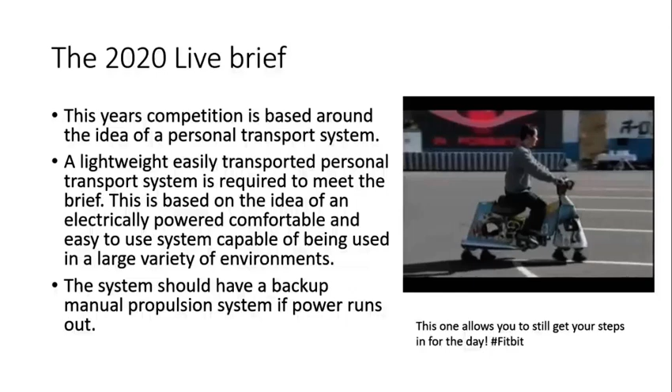First of all, this year's brief is a competition based around a personal transport system. We need you to make a lightweight, easily transported personal transport system that will fit into a rucksack. The rucksack is up to you, but there is a criteria that will look at how large that rucksack is and how much the item actually weighs. So lightweight is the key, small, portable, but yet functional. There's going to be a fine balance between those.

The main project itself is deliberately quite open this year, to allow you to create and use your mind as much as possible to come up with a solution that's as diverse, new, as old. It can be exactly the same as something from before, or it can be something completely new. It's up to you. We've left the criteria really open so that you can choose.

But broadly speaking, the competition will still follow a set format. The main project this year is worth 41.5% of the marks. That is quite a low mark, and even if you scored 100% on the main project without the other elements, you will struggle to get anywhere near the medals. The second part is the main project costs, which comes to 5%. We'll go into those in a little more detail.

Portfolio A is worth 10% of the marks, and that's something that you bring with you, something that you could have done before the competition, so you should be looking to maximise those marks when you arrive. And Portfolio B, which is the CAD drawings, is worth 13.5% of the marks.

There will also be an additional 3 surprise projects worth 30% of the marks. So please note the surprise projects are worth almost as much as the main project, and the costings and the Portfolio A and B are worth almost as much again. So it's critical that you realise the main project is not the only element of the competition.

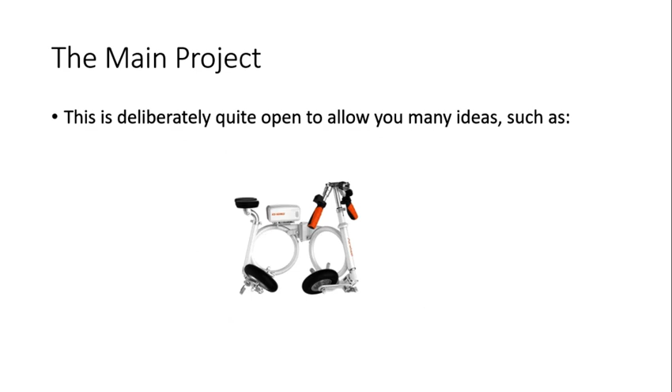Something that's a little bit more likely is something like an electric push bike that folds, such as the one on the screen, although I would suggest that might be a complicated build for 3 days as well, but you may have another similar solution.

Or you could go for something such as an electric skateboard. Very easy to put into a rucksack, not so easy to ride, perhaps not so manoeuvrable as some of the other options, but it's up to you on which way and which direction you want to take.

So the main project itself has 21 elements, and some of those elements have sub-elements, so there are quite a few criteria to hit, I think around the 30 mark. So the following slides, I'm going to go through each one of those individually and explain what we mean, and make sure that you're happy with what's required.

So the first one is toolbox weight. Now this is the first time that this has been brought into the UK national competition, but it's a normal mainstay of an international competition. So we brought it in to bring parallels. This requires you to design the item to be made with the minimum amount of tooling and the minimum amount of jigs etc. that you bring with you. This is part of our sustainability drive, really.

So instead of shipping large amounts of components, large amounts of equipment around the country, we'd rather you just brought a little handbag. But of course you may need more than that.

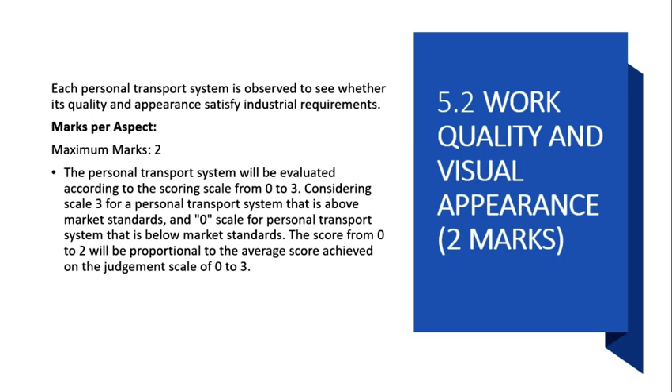How we mark that is each judge will be asked to mark it from 0 to 3, 0 being below industry standard, 3 being the absolute excellence of market standard. The 2 marks allocated will be split into equal proportions for each judge, and you will receive 1/3 of the mark for each point that the judge gives you. So if a judge gives you 2 and there are 3 judges, you'll receive 2/9 of the 2 marks for that judge.

So the judgment scale literally looks at this. Scale 0: project does not meet industry standard. That would be unfinished, very, very poor. Wheels buckling, not fitted correctly, motor not connected, all those kinds of things.

Scale 1 then satisfies the industry standard, so it's better than that. It is complete, it's finished, it's assembled, it's operational, but it doesn't have any outstanding features. It's just a plain bog standard design, something very basic, very easy to have made. Perhaps the finish on it isn't very good.

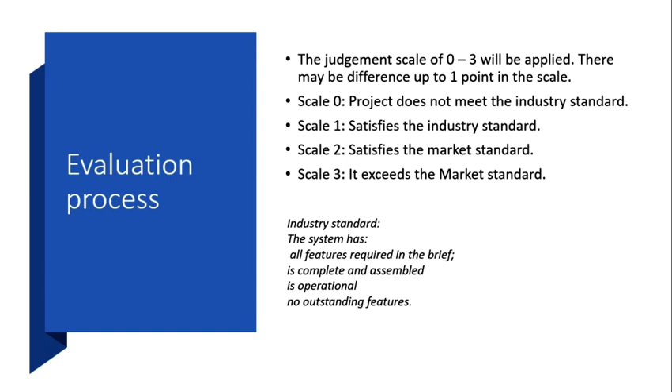Scale 2 satisfies the market standard. We're now looking at something that's complete and works, as in scale 1. We're also looking for a finished exterior, coloured on all visible surfaces, has all burrs removed and no sharp edges, all screws and fixings are hidden or are part of the aesthetic design, and you will be consulted as to whether that's the case or not. Minor blemishes, bubbles or defects can be seen in the surface finish, but nothing major - no big huge scratches or marks or indentations or anything like that.

And then the final one, scale 3, exceeds market standard. To exceed market standard, you have to have satisfied everything on scale 1, scale 2, plus all market standard features, plus a flawless finish to the exterior, no blemishes, bubbles or defects can be seen on the surface, and the addition of graphics or a logo on the exterior to attract potential buyers.

We all know big brands - Apple, Microsoft, Nike. You all know the logo for those brands, and it is the logo that brings in a lot of their business. So we're looking for something similar to that as well.

All drive components, save steering, wheels and axles, are covered from user access, so we shouldn't be able to see the chain or motor or any cogs or anything like that. Anything that could cause a potential trap hazard or potentially hurt the user, we don't want to be able to access that. Wheels and steering obviously have to be an exception, and the same goes for axles.

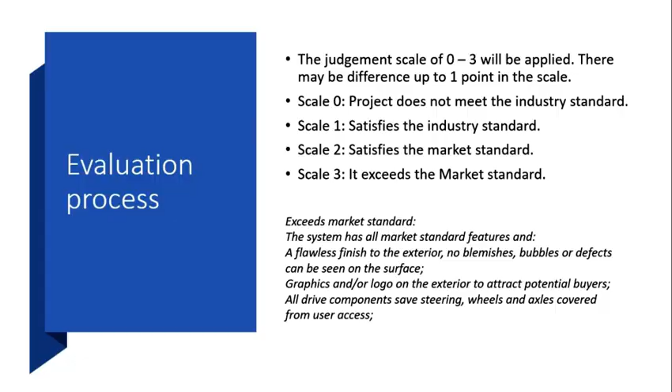So right at the very end of the competition, we're going to do something new, which is the judges packing and unpacking evaluation. You're asked for instructions on how to remove the item from the rucksack in Portfolio A, and then how to set it up, giving all clear labelled instructions throughout the portfolio.

Show how to do that in very simple English, very detailed if possible. The more detailed, the better the mark, because the judges, using nothing but those instructions, have to remove your item from the rucksack, unpack it, drive it 2.5 meters, and pack it back away. We'll time that to indicate how simple and easy it is, but that's not the main criteria. The main criteria will be ease of unpacking, so a judgment of the setup instructions.

If we can't do it using your instructions, you'll receive no marks. If we can do it but don't feel the instructions are clear, you'll get 0.2 marks. If the instructions are clear but it's difficult to set up, 0.4 marks. Clear instructions and an easy setup will gain you 0.6 marks.

The second sub-criteria is ease of operation. If we could not do the operation with the instructions, so we don't know how to turn it on, or make it move, or get it going, you'll receive 0 marks.

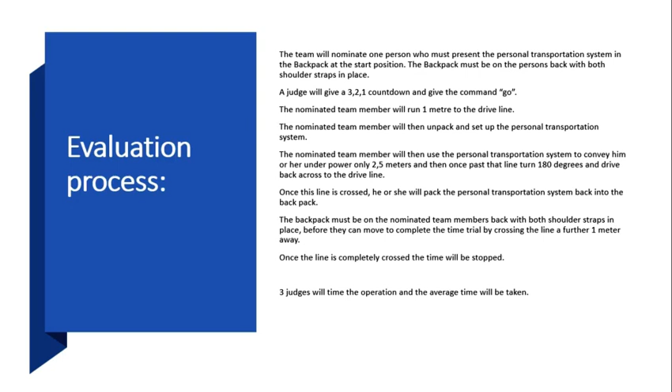Judges will time all of this, and you'll be asked to declare by putting your hands up when you've finished. As soon as your hands are up and finished, we will check that both the backpack straps are in place and that you've crossed the line, and the time will stand. So, weight.

We are going to basically weigh your entire system. That'll be the rucksack, batteries, control system, and the personal transport vehicle all in one. We will then see whose is the lightest, and the lightest team will gain 2 marks. The heaviest team gets 0, and the other 4 teams in between will be marked proportionally.

This is what we call CIS scoring. There's quite a lot of it in most MTC test projects, and it's a way of sorting who performs best from who performs worst from who performs in a mediocre manner.

So now we're looking at 5.6 for ergonomic hand controls. 3 judges will hold the hand controls. For safety, the hand controls must have an easy to press dead man switch to cut power when released. It could be part of the speed control mechanism, such as a trigger, but when it's released it must spring open and stop all power. Or it could be a separate button that you press, with speed controlled some other way.

So for having a dead man switch that cuts all power, you receive 0.5 marks. For having speed control, you receive 0.5 marks. And for having an ergonomically easy to handle control with a nice button or a nice speed control system, or both, or one or the other, whichever way it's being done, operable by just one hand, not two, you will receive 1 mark.

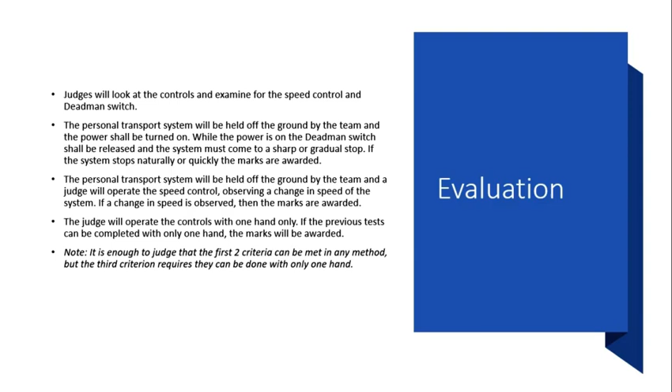We'll also hold it off the ground again, and you will demonstrate the speed control, and we need to observe a definite change in speed as you maneuver it. Then the judge will operate the hand controls with one hand only, to ascertain how easy it is.

So safety, this is a mainstay, always there, always the same. There are 4 points to the safety. All movable components must be guarded from access with an item larger than a rod of 12mm in diameter and 75mm in length.

What this actually means is if you have a gap that's only 6mm wide, you couldn't get a finger in, so that's acceptable. But if you have a 14mm gap that a finger could go in and be potentially trapped, then that is more of a problem. The only movable parts allowed to be seen are the wheels of the system, and this does not apply during setup and packing, because with folding mechanisms other things may become exposed.

All conductive components and electrical circuits shall be guarded from access. That's fine to see wires. What's not fine is to see the conductor at the end of the wires, so the conductors should be fitted in tightly so no actual wire conductor can be seen.

All sharp edges should be removed. The last thing you would want with a sellable product is to pick it up and slice the hand of the user. So there should be no sharp edges or burrs or anything that could cause a potential problem.

The personal transport system should also have appropriate warning labels. These are things such as trap hazard, crushing hazard, affix this pin before use, maybe a safety label you want to use, or danger, electrical shock hazard on control systems if the user was to open a box containing, for example, a set of relays that power your motors.

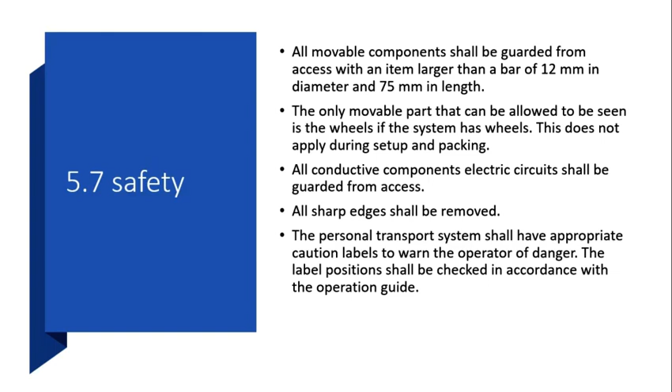So all of these things are up to you which are appropriate, but if you don't have any labels, you won't get the mark, because there are at least four that should apply in every single instance. Let's look at those in a little more detail. What will happen here is all movable components are guarded, and we test it with the rod as specified a little earlier.

Every time we find an area that is not compliant, we will remove 0.2 marks from the total of 1. So as soon as we find 5 areas, your score is 0. This is something we find quite often because the competition is rushed and people are getting behind on things. They tend to miss these areas out, and it's quite common for teams to drop a couple of marks across these areas. Not desirable. The best thing you can do is maximize this score because they're quite easy to get.

Conductive components, again, same rule. We have 1 mark given automatically, and 0.2 marks is subtracted every time we find an exposed conductor or cable. Same for sharp edges. Again, 1 is given straight away, and 0.2 marks are subtracted every time we see it.

Caution labels then. As I said, you need at least 4, really. 5 or more is desirable, but at least 4. They need to be specified in Portfolio A as to where they are, and there's marks for that as well. For every one that is not placed where it's said to be in Portfolio A, or if there's no listing for where they should be in Portfolio A, or there are no caution labels, then you will receive 0 marks. Otherwise, for each missing or incorrect one, we will remove 0.2 marks.

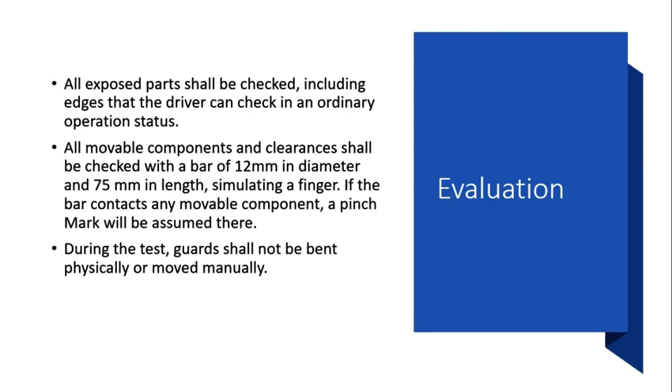So we check them as detailed here. All exposed parts will be checked. You'll find that's the only time the judges really touch your project, but we have to in order to ascertain if there's sharp edges and burrs, etc. We will expect you to place it on the floor where we can see. We will not lift it up to look underneath, but we will trust you and assume that there are no conductors underneath. Nothing can be bent or physically moved.

5.8 then: the system shall have a manual propulsion system. This is kind of an emergency backup. Let's say your batteries die completely and you don't want to be carrying the personal transport system, as it was there to stop you having to walk. So if you don't want to walk, you really don't want to carry it while walking.

So some kind of manual propulsion system will be needed. What we'll do with this one is ask you to mount or board your system. We will ask you to disconnect the battery so that it cannot be used to run or charge it, and then you will demonstrate a manual propulsion system. Note, and this is the big note: manual propulsion system, if it's a skateboard for example, is not putting your foot on the floor and pushing. No part of the person demonstrating the system can touch the ground during the demonstration, so there must be another mechanism that allows it to be propelled.

Not limited to pedals. There's no limit on whether this could be a pole that pushes. It can be anything you want. It could be a ratchet mechanism on a set of handlebars that allows you to do it. There are a lot of possibilities. But your system must include one to get these 2 marks. If for some reason you don't include one, it's an automatic 0.

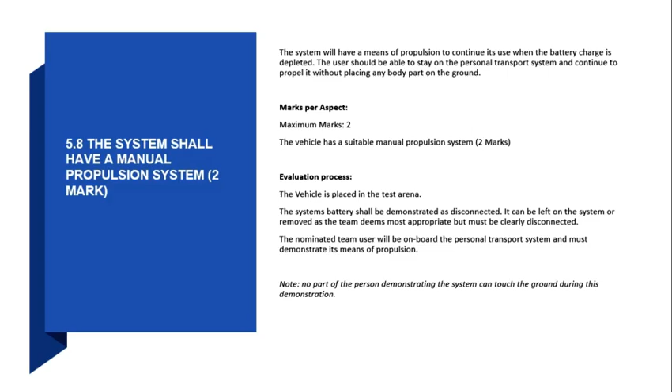Stopping in a safe distance, 5.9. The vehicle should be able to stop within 500 millimeters. We will ask you to drive your vehicle up to a line on a 3-2-1, and the nominated team member will move towards the line from 2 meters away. When you've covered the 2 meters in under 5 seconds, which means you have to hit a minimum speed, you will be asked to stop, or you'll approach the line and stop. You will have 500 millimeters and only 500 millimeters to completely come to a halt without falling off, hopefully. If that is the case, you will be given the 1 mark. We will time that from when the front wheel or wheels cross the line to where it stops, and the front wheels should be within the 500 millimeters.

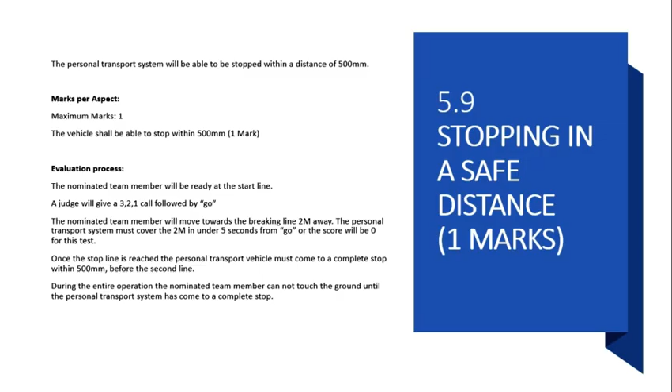Speed test. Now this is quite an interesting one. The team must cover a distance of 10 meters in 3 seconds or less. We will have space for a small run-up, but it will only be small, and we will have space for a small braking area, but again a small braking area. Please, please, please do not drive it through my office wall — I will be in so much trouble if you do. So what we're looking for is a minimum of 12 kilometers per hour, and if you work out 12 kilometers an hour to cover 10 meters, that comes to 3 seconds.

So it must reach a minimum of 12 kilometers per hour, perhaps a little bit faster to be safe. We will ask you to start the run-up wherever you like, and when you cross the start of the 10-meter line, we will start a stopwatch. We will stop it when you cross the back end of the line.

3 judges will do all of that and make sure that the time is under 3 seconds. For example, if one judge says it's 2.98, one says 2.99, and one says 3.01, we would assume that it's under 3 seconds. If, however, all said it was 3.5, 3.6, and 3.1, then, well, I hope we're not that inaccurate, but it could happen, then we would actually give you a 0.

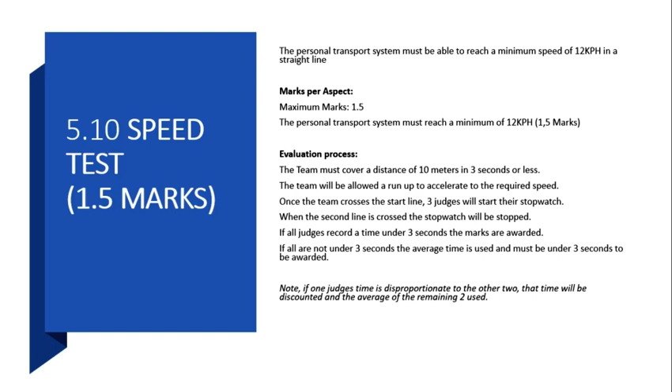Okay, system interface. Now this is a little bit of a departure. This is an either or, a choose your method, so there are 2 methods you can do. And the system interface is there to give information to the user of speed and battery status.

So the first option you have is that these can be relayed by voice in 2-minute intervals. So a voice system saying your battery charge is, or a voice system your current speed is, and it must be relayed within 2 minutes. So 2 minutes is the maximum time it can have in between.

Now the battery charge status relayed within 2 minutes from the last time it was told will receive 1 mark, and by relaying the speed within 2 minutes you will also get 1 mark. We'll ask you to demonstrate that, of course.

The battery charge status shown as XX% using a display on user glasses, goggles or other eye covering. So basically we're looking for a display that can be worn, perhaps part of the helmet, and is in front of the eye so that it can be seen. Now we don't want that to block vision, obviously, so you'd have to look at some careful placement of that, but XX%, so 0 to 99% should be displayed of the battery charge status, and if you can do it that way you will receive 1.5 marks.

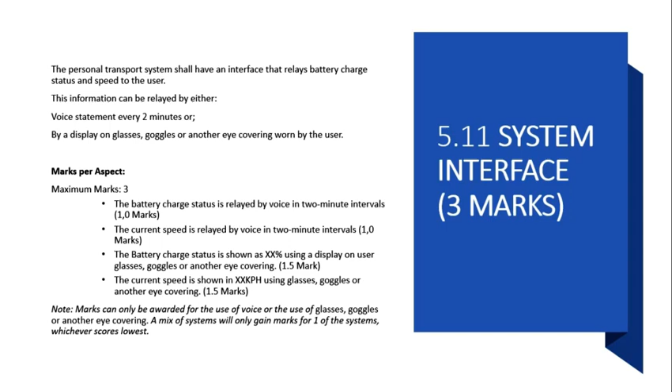So it's one system or the other, not a mixture, and you will only receive the marks if they are being in work. Okay, so we will ask you to demonstrate the system of choosing to the judge.

If the voice system is chosen, then the speed and battery notifications must occur between 100 and 140 seconds apart. If the augmented reality glasses system is used, then you must demonstrate it by lifting the wheels from the floor and showing the variance of wheel speed.

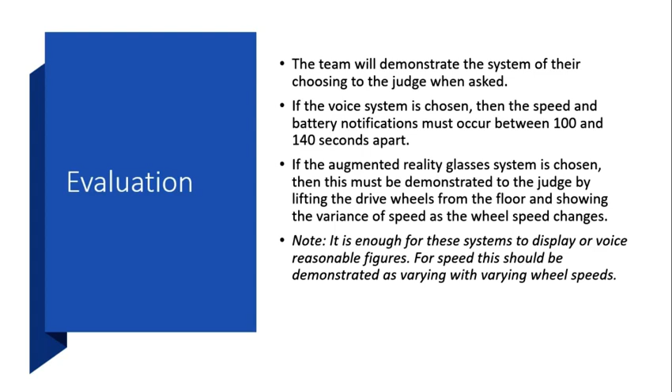Okay, so as it says again, it is enough for the system to display or voice reasonable figures. We're not going to check them for accuracy, just for the technical ability to actually do it.

Then we're going to have a straight line race. Now this is going to be fun. The teams will race a 20-meter course, although plan for a 20-meter course you may find that for some reason that due to NEC restrictions we might have to have a shorter course, but we will try for 20 meters. At the moment that's planned in.

So maximum marks for this is 2, for the team with the fastest time to cover 20 meters, and going back to 3 seconds to cover 10 meters, we should be able to do this in 6. However, it is going to be from a standing start. You won't get a run up this time, so I'm expecting a time of around 10 seconds really, but of course some teams might be able to do it in half that time and some might take twice that time.

So what will happen is, when we've recorded all times, the fastest team will receive 2 marks and the slowest team will receive 0. You must nominate a driver to attempt that, and you will be given a 3, 2, 1, go to start the stopwatch, and when you pass an end line you will be stopped.

Flashing lights, 5.13. This should be an easy mark really, but we require flashing lights at the front of the personal transport system and flashing lights at the rear. So when the dead man's switch is pressed and the system is active, those lights should be on.

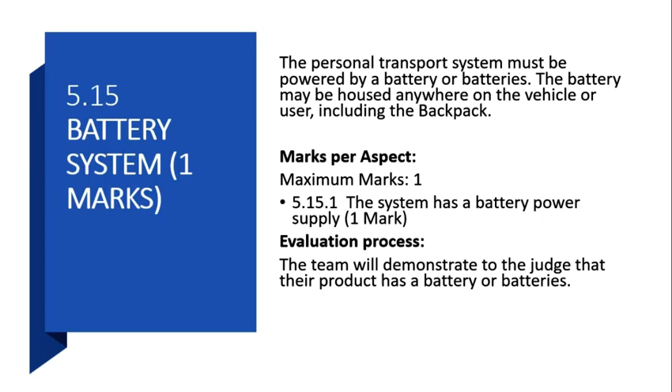So then we come to the biggie, the course time trial. This tends to be the main focus of every team, and a lot of teams forget all the other details because this is the important thing. But note, it's only worth 4 marks, that's not even 10% of this section, let alone the entire competition. So yes, it's important, yes you need to do it, yes scoring well is brilliant, but do not forget the other stuff and just concentrate on this, although I will admit this is the fun part.

So what we're going to do is give you 4 sections, and you can cover those 4 sections in any order and at any speed you like, but you must cover all 4 sections to get the best marks. Stage 1 is flat ground with turns, so nice and easy, you're just going to have to do a bit of a chicane manoeuvre, as Appendix 2 will show you.

Stage 2, gravel and dust. We're going to have some gravel that's suitably muddy and dusty, all held in a frame, and you must be able to cover that. Stage 3 is uneven ground, much like most of our urbanised streets, not completely flat. You might have flagstones with little nobules in between them to judder your vehicle, you might have a curb to negotiate, changing heights of paths, and all those kinds of things. The uneven ground is there to simulate that.

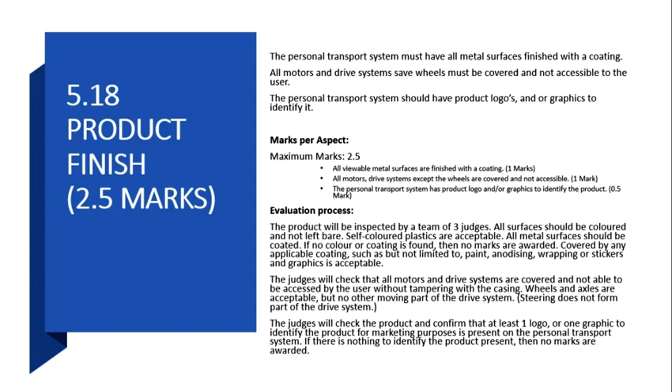So if you look at the evaluation process, it gives you some examples of what coverings you could use, okay? And it's important for this one that that's actually done, because we're looking at trying to make a real world product.

So consumer demonstration, we're going to get the public in, we're going to line up your personal transport systems, and we're going to ask each team to demonstrate this for 30 minutes. And judges will ask the public to view all 6 systems and grade them in order from most favourite to least. Okay, so they'll give you a score of 1 for their favourite and 6 for their least favourite, with all the others 2 to 5 in between, obviously.

The team with the lowest score at the end of this will gain 2 marks. The team with the highest score, 0. Now, we are...

very aware that you will have friends, family, company representatives, etc., all coming to watch. So we will also do our best to find completely unbiased people who don't belong to any particular group that your team could be identified with, and we'll see what we can do from there.

Conformity to drawings. We will take the drawings you've handed in and agree 4 common parts. We will look at these 4 parts, measure them, check them, and make sure they conform to the drawing.

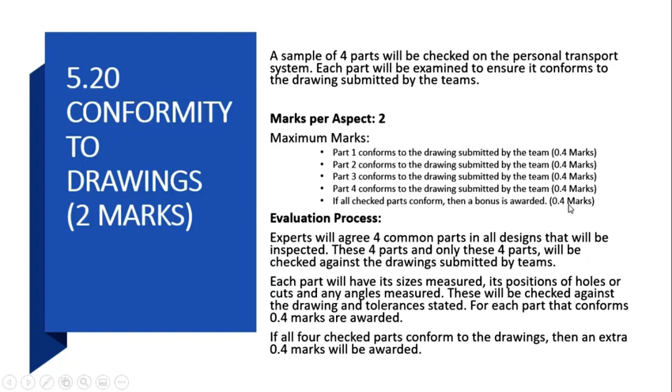If all 4 parts are correct, there's a bonus of an extra 0.4 marks. So if you only have 3 correct, you get 1.2 marks, 2 correct is 0.8, 1 correct is 0.4, but if all 4 are correct, you get the bonus 0.4 marks, so you score 2.

The last one is the packed volume. We will ask you to pack your vehicle into the rucksack with batteries, controls, everything, and put it on a bench. We will then measure the volume using maximum length, maximum width, maximum height. We will not take account of curves or anything like that - there's just no time to do all that at the competition. So it's the maximums we will use to calculate the volume.

Now we've finished that, the next section we'll look at is costings. The costings are quite important - the difference last year, 2019, between gold and silver was 0.18 marks. This section is worth 5 marks in total, but the working hours alone are worth 2.5 marks.

So what we do is ask you to book on and book off your stand. We ask you to book your machinery and usage of supplied machinery as well. This does include the surprise project. If one person is working, it's considered all of the team is working, and you are costed for all team members, currently £90 an hour.

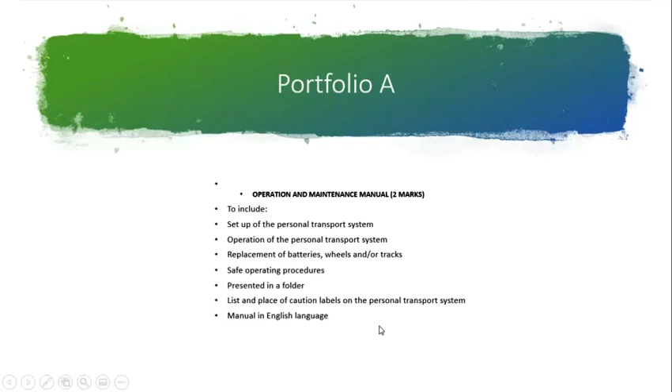If you've got really good instructions with real clear pictures, lots and lots of arrows and knowing exactly what we're talking about, then brilliant, that's going to help with your grade. So we also want replacement of batteries, wheels and or tracks, because you may have a tracked vehicle. Safe operating procedures - how do we operate it safely? What are the parameters we can't do? For example, can we take an electric vehicle and run it through 6 feet of water? Or is it safe only up to 5 centimeters of water? Is it safe to go near water at all? We don't know. It needs to be presented in a folder, and it needs to have a list and place of caution labels of the personal transport, and it must be in English.

Now we're going back to these - you do not meet the industry standard, it's 0 marks if you do not have all of those elements in it. The judge will automatically give you 0 marks. If you satisfy the industry standard, as in it's an industry type technical manual with all of the detail but not very well presented, it's not glossy, it's not showy, then you satisfy the industry mark, the judge is likely to give you a scale 1.

If you satisfy the market standard, which is slightly above that, that's the kind of thing you'd expect to come with a product you'd purchase. So if you've got a new microwave, what's the kind of standard that comes with that? What kind of manual do you get when you buy a car? That kind of thing, that's satisfying the market standard. But you can exceed the market standard by first satisfying the market standard and then by giving additional information that wasn't asked for in the brief. So if we go back to that list, is there things you can tell us that were not asked for? If there are, then you could be looking at scale 3.